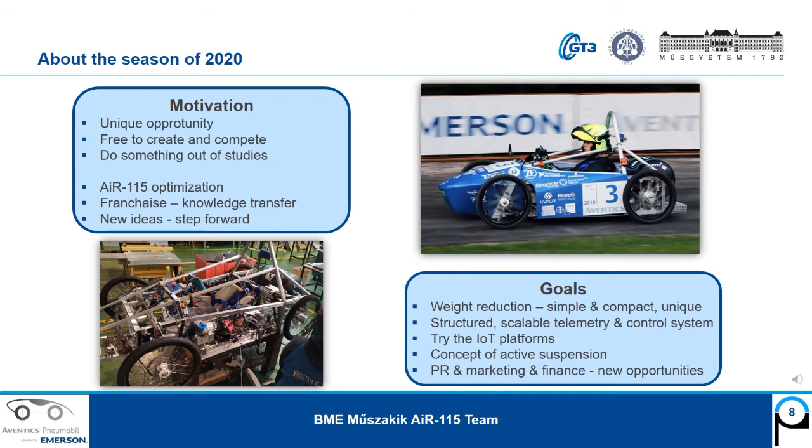Let us have a closer look at our organization. This is a team of 12 members: mechanical, IT, electric engineers, and we have an extra person who helps everywhere, we just call it the Joker. Basically, the team is structured into sections like mechanical design, simulation, mechatronic or electric design, and operative force, where management, PR, and marketing happen. There are subsections in every area, meaning everyone has his own responsibility.

For example, usually the pilot is a member of our control section. But we help each other in every aspect. For instance, the building phase is a common task where we can see the birth process of our baby.

Seniors are also very important. We rely on them in many areas, and in the near future we will be those old boys.

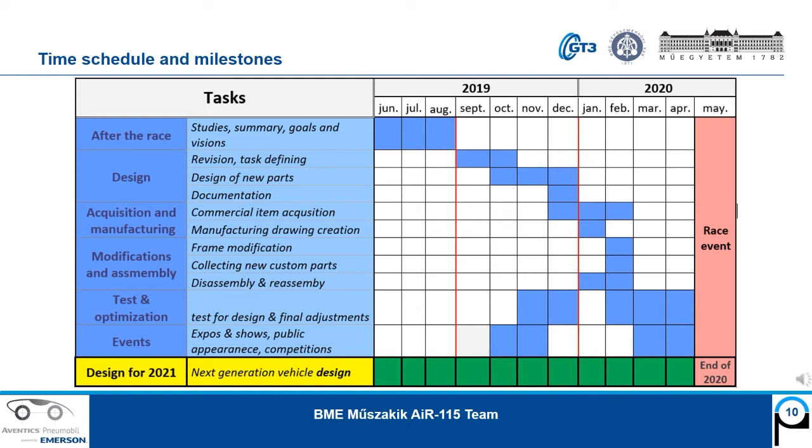As I mentioned finances before, here we are. You may be familiar with the case that the planned cost is lower than the real cost. That's why we invest energy into sponsorship in manufacturing for complex parts, while simple parts are manufactured by ourselves, because time is essential here.

We also reuse parts from previous vehicles or maybe from other machines. Then we always deep search the market to find the perfect vendor among several. We design with precision and creativity and choose quality materials to get lightweight but durable parts. This way you can avoid amortization, bad or broken part costs.

We create resources from sponsors, donations and tenders too. To achieve this, we improved our PR strategy and made marketing materials.

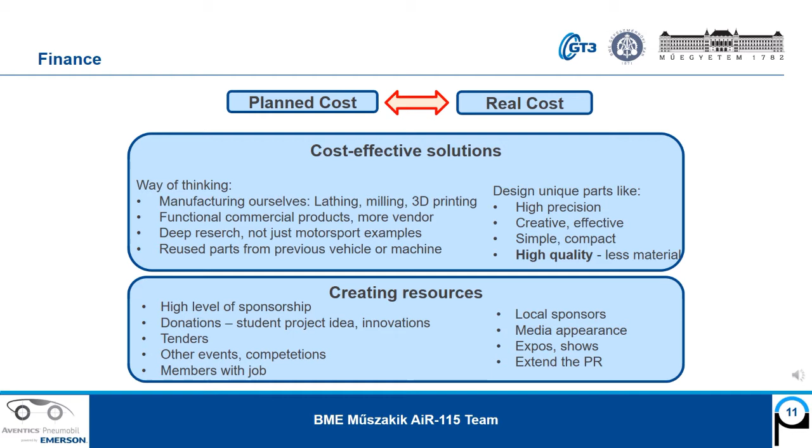In the following, I'd like to share with you some simple tricks and tips which can be used by you as well. One of them is visualization. It is worth making an ergonomic, nice coverage design. It is much more likable for your eyes.

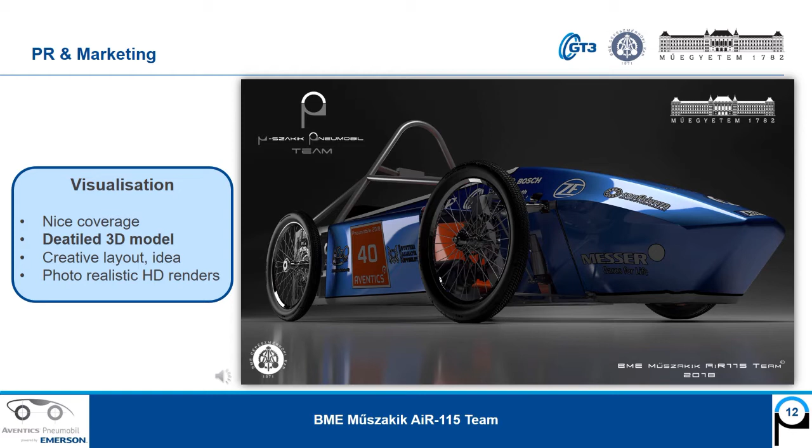During the design process, you make your 3D CAD model anyway. We just put a little more energy into it in order to make it photorealistic, faster, with creative layouts. The results of this visualization can be used for many contents, just like introductory brochures.

Then I suggest you to take part in other competitive events as well. It is very exciting, strengthens team spirit, and you can learn a lot when trying something new. In addition to this, it's a good PR opportunity to meet wannabe supporters or to make contact with other teams, share experiences, or learn from each other.

There is a bunch of things we learned thanks to this project. I'll highlight some of those. In teamwork, how important it is to find the members' strong points and make the communication as fluent as we can. To complete time planning, we split our goals into clear tasks to face real problems, and then we can make fair deadlines.

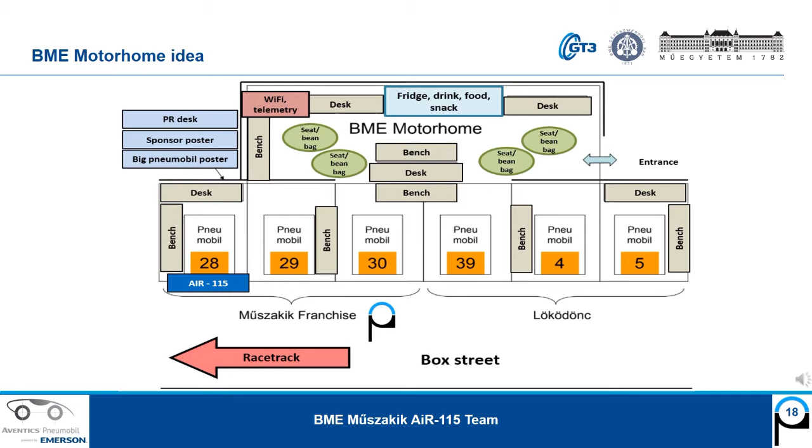Well, I think I have said everything I wanted, so I hope I could give precious information. Before giving back the virtual microphone to Zsolt, let me wish you a successful preparation for the next season, where we will see each other on the track. See you there.

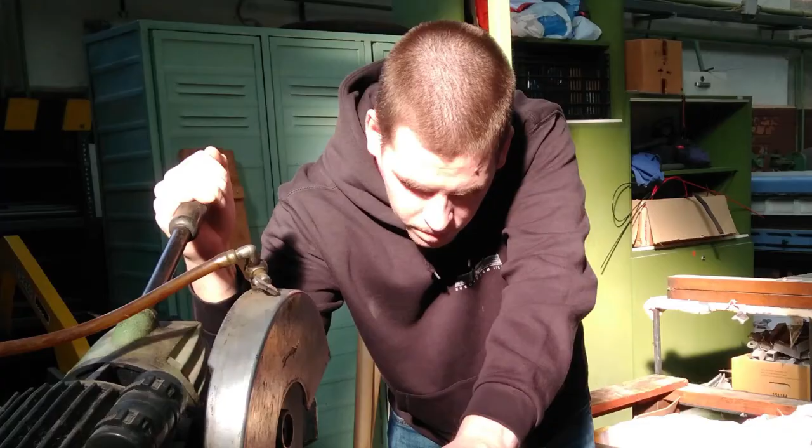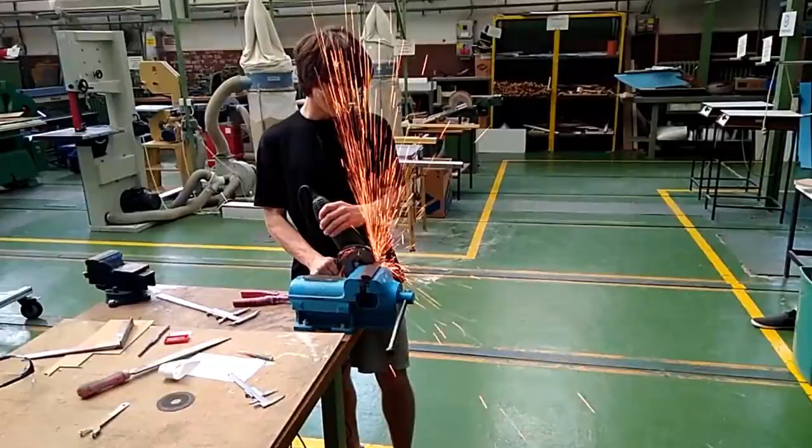We have also asked Team Technics 5 from the Estonian University of Life Sciences to share their experiences and challenges that they faced during the Pneumobile project, with special focus on preparing the technical documentation, task and team management, and working on innovations for their vehicle.

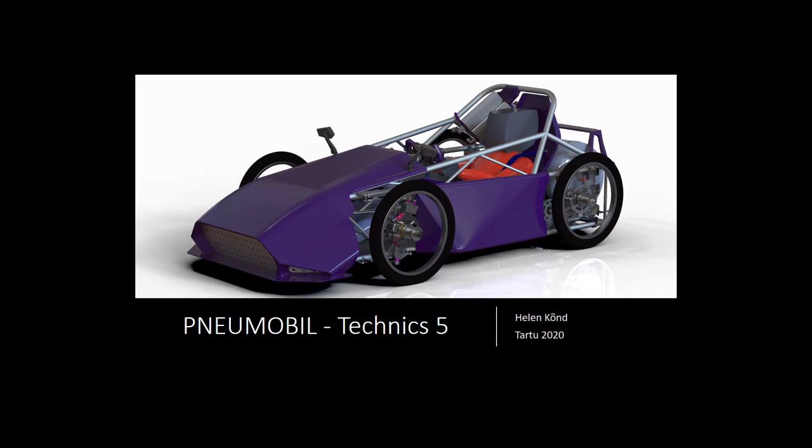Technics 5 Pneumobil Racing Team is part of a larger Estonian Pneumobil program, which is a significant project of our student association, Tehnikaüliõpilaste Selts - direct translation to English would be Technical Students Association. It was founded by Estonian University of Life Sciences technology students in 2009.

We have participated in the competition since 2014, with up to 3 teams per year.

The Pneumobil project is a great opportunity for teamwork exercise. It is quite lengthy, taking a good portion of the educational year and therefore requiring time management skills. And it is difficult enough to push people to the breaking point and giving up.

Team members who will make it to the end usually stick together in classes and other projects, as well as after the school has ended. Time management is probably the key to success. The constant balancing between school, hobbies, family, friends, work, and the project can be quite stressful at times.

We are using several different Facebook Messenger chats for project-related conversations. As well, we have created Facebook events as reminders for important dates. Every Wednesday at 6 o'clock, we are having a general meeting to discuss student association's events, projects, and other problems which have arisen. Since the pandemic, we have moved our meetings to Discord.

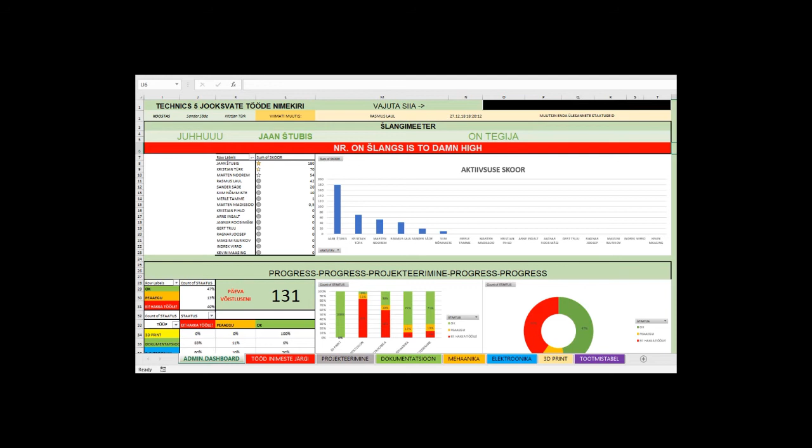New programmers had no experience writing code, which means that everyone had to develop their coding skills quickly. Luckily, LabVIEW language is pretty cool to start with.

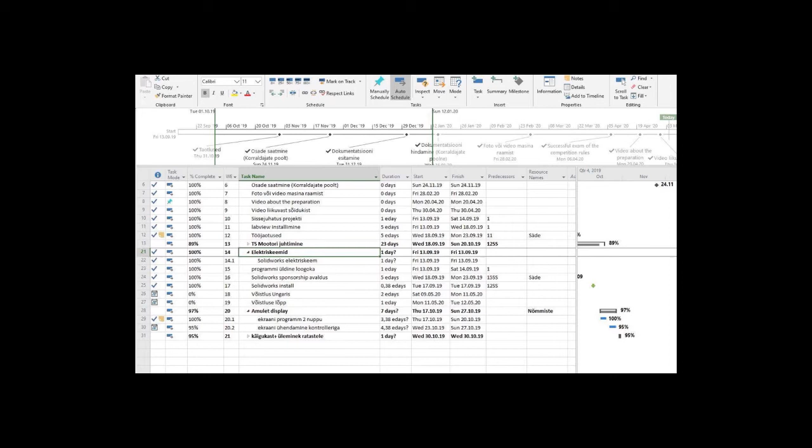The electrician team leader used a Microsoft Project Manager to create a structure to build on. We use Trello to share tasks for team members because Microsoft Project Manager is too complex a program for sharing tasks.

The administrative section consists of people who are looking for funds, sponsorship opportunities, keep track of the resources, as well as do PR-related tasks. The administrative section consists of veterans and elder members who try to guide and help youngsters as best as they can.

The team is also supported by mentors, which consists of graduates and association veterans who mostly work in the prototype machine building section and therefore can give advice in all sorts of fields, as well as provide contacts and support for gathering materials for the vehicle.

The project starts with a detailed study of the competition rules to figure out what are the technical limitations of the vehicle. Large attention is put on the grey areas of the rules, as well as the things which might have gotten lost in the translation of the text.

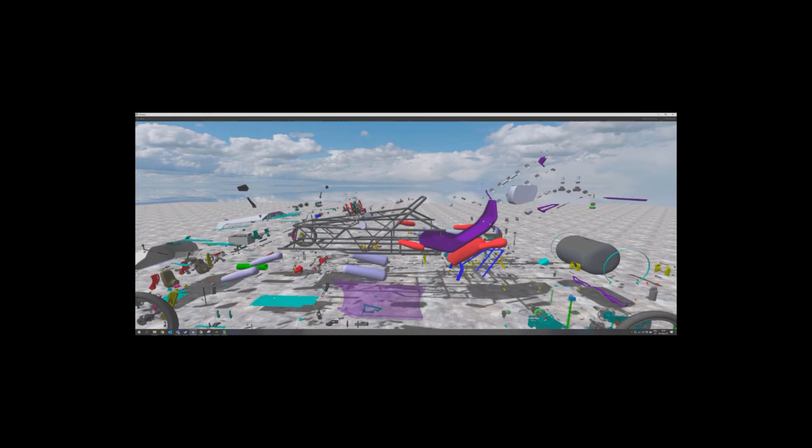In our design, we try to keep the most important thing in mind: someone has to manufacture it. Therefore, we use a lot of sheet metal parts and try to simplify details in every step of the way.

After the designers have produced a presentable picture of the vehicle, we start actively contacting Estonian companies with sponsorship emails. Companies usually don't want to give money, so it's smarter to figure out which components are produced or retailed by which companies. This way we have most of our material lists covered, and the free money can be used for things we didn't get from sponsors.

The most important thing to remember in the design phase is that if something goes wrong, and something will most definitely go wrong, what are the plan B, C and D? Can the vehicle be repaired in the competition area with very limited tools? If not, then a different design is needed. All components with potential to fail must have a backup, as well as a backup to that backup.

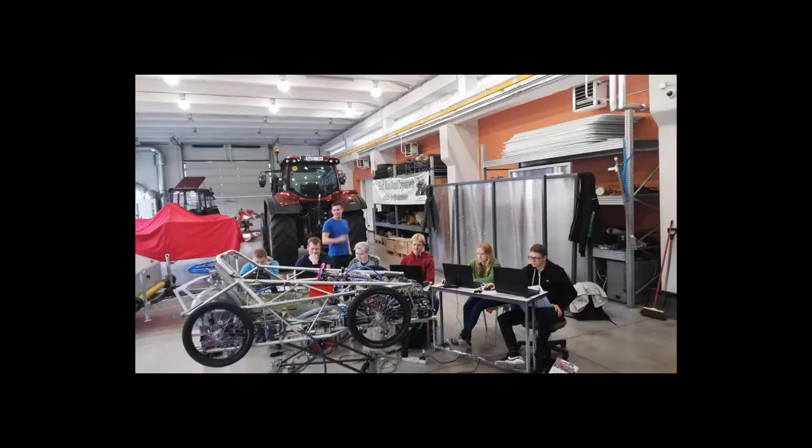Testing is one of the most important steps that we have constantly failed to do due to lack of time each year. The project needs constant work every day, even for just a few hours, to achieve reasonable results.

The success of good technical documentation starts with a thorough analysis of the competition rules. We've put a lot of effort into making the documents ordered and pleasing to read for the audience. Most of all, we try to put ourselves in the shoes of the reader. For example, can a reader with no technical knowledge understand what a pneumobile is and what we are trying to present?

The documentation is usually made in three parts. First, the draft - the first view of the documentation, usually quite messy but still answering the points. Second, the final product, where the documentation is collectively overviewed and repaired into final form. Third, the edited final product - usually 2 to 3 days later, the documentation is reviewed again with the whole team and repaired and clarified further.

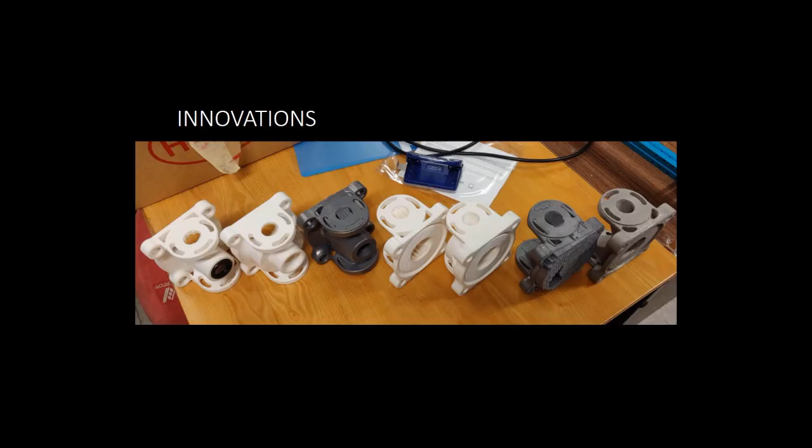A good 3D model is key for great pictures in the documentation. We have done quite a few unique and crazy designs over the years: a radial motor, automatic planetary gearbox, remote-controlled vehicle, self-driving vehicle, continuously variable transmission system, and experimental parts designs, to name a few.

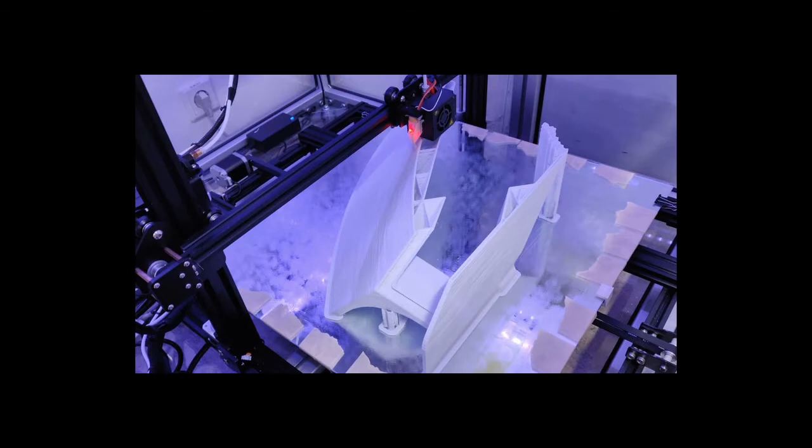Technics 5 is a test platform for extensive 3D printing technology. Body panels are manufactured using a large-scale plastic FDM 3D printer, allowing complicated contours, with fiberglass added for lightweight construction. In cooperation with Tallinn University of Technology's Material Development Department, several parts, such as cylinder heads and details in the steering system, are 3D printed from stainless steel. Custom cylinder heads are used to benefit from high flow rate AS5 valves.

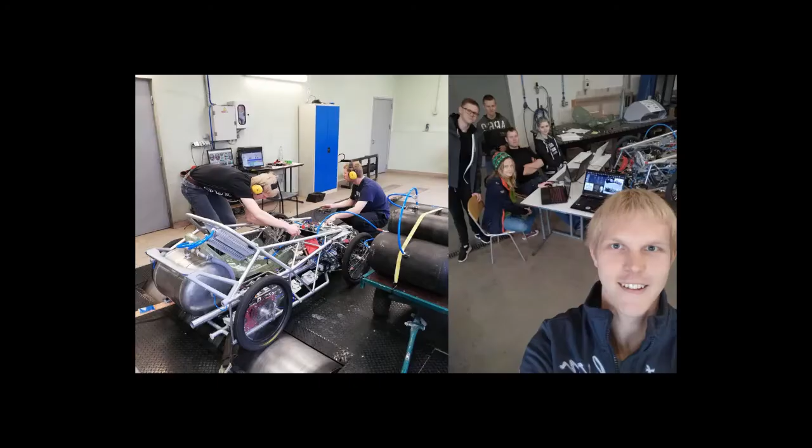I hope you got a slight insight into our organization's inner workings and found something useful to improve your teamwork, as well as your team's technical documentation. Thank you for your attention. And in conclusion, the most important thing is to just do it.

Thank you very much again to both teams for the excellent presentations. I hope we will see these innovations next year.

Thanks, Zsolt. Can we finally know who the winners are? Sure. Well, before that, I've also prepared something for today - a slideshow with the winners of the Best Pneumobile Award from the past 12 years. You should have a look at it. It's really interesting to see how the vehicles evolved during these years.